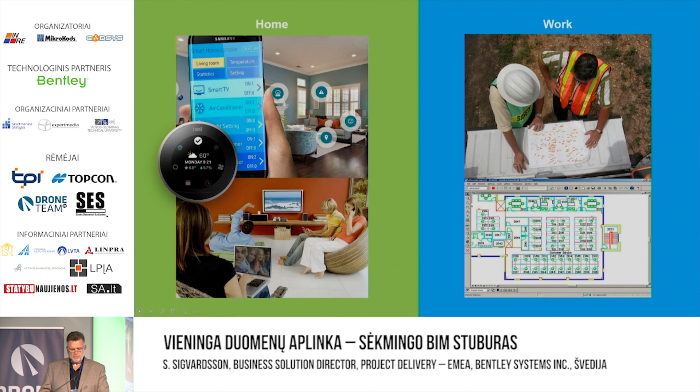Then we started to look into some more. We did see that, well, it still didn't work. We needed to include the supply chain into this as well. And that's why we started to work on cloud services for ProjectWise. But before going into that, you saw a bit of this in the previous presentation, we needed to get the technology, the processes, the people together, and also the politics, as Vladimir was saying previously.

This came pretty convenient to us, I must say, because we delivered our CONNECT Edition, our software, that was delivered in October 3 years ago. And then it went on to the summer of 2016 when McKinsey came with this survey, which wasn't that good to the construction industry.

So as you can see, we have construction down here, and below is agricultural and hunting. And I usually say that, well, if hunting was out of there, agricultural will be higher up in the hierarchy, because they're pretty good on digitalization. And we can see the IT companies and the media and so on are up there in the top. But there is still a lot to do in construction.

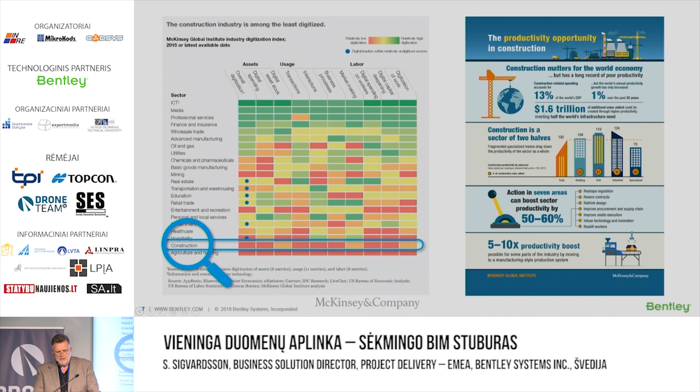And the good thing here is, or good or bad, is that there is a lot of money within the construction business. So there is a lot of money we could save by going more digital in the construction area. So they saw 5 areas, one being higher definition surveying and geolocation. I know Topcon is here. Today we have a strategic relationship with Topcon, so that goes into that area.

The next one is 5D building information modeling. This summer we acquired a company in the UK and the US called Synchro Software, where you actually can do the planning, so you can have your planning together with your 3D model, and then you will be able to also include your resources and cost of material and all of that into this software. So that is going like 5D BIM.

Digital collaboration and mobility was another area. So that is where we get in with ProjectWise and our cloud services. The fourth one is the Internet of Things. That is where sensors come in, to have sensors built into your materials that could be used during the construction, but also further on, sensors that could be used in operation of the infrastructure.

And then the last one is going into future-proof design and construction, so new materials, new methods of working, and so on. So out of this, you can also say that what we're talking about here today is all about, well, BIM. So the question is what BIM is. It could be building information modeling. It could be better information modeling. Or internally at Bentley, sometimes we call it Bentley information modeling.

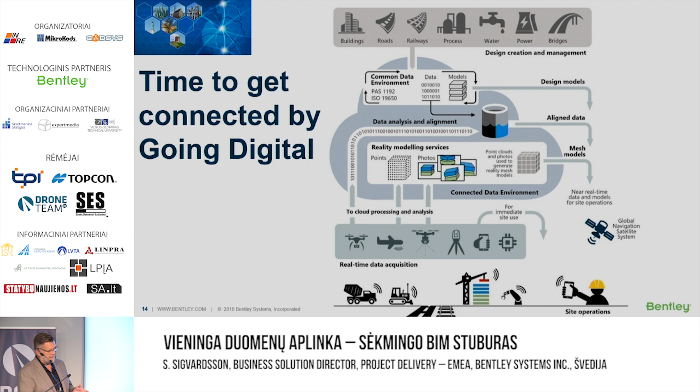Out of these, the design models, you work together with the align model and the mesh models, so you can work on the reality. The reality modeling you can do by collecting photos. We send those photos into our ContextCapture in the Azure cloud, do the computation, and you could get things like this.

So this is pure photos. Probably you know where it is, but it is a mesh model that is done out of 142,000 high-resolution photos, and it has an accuracy of 7 to 10 centimeters. If you're on a closer distance to the reality and take more pictures, then you're getting an even better accuracy in your model.

Those models could be used further on for design, but they could also be used within construction. You could actually fly a drone over the project during construction and pick up the information to get the status of the construction site. That could be done weekly or something like that.

To be able to do that, some people talk about the common data environment. We at Bentley even talk about a connected data environment. We need to have connected users, connected projects, connected assets, and connected enterprises. Within project delivery, we have the design work sharing, the BIM review, something we call BIM bid management, which we use quite a lot in the US, and construction management of, now I lost the word, but all the papers within the project, all the agreements and whatever.

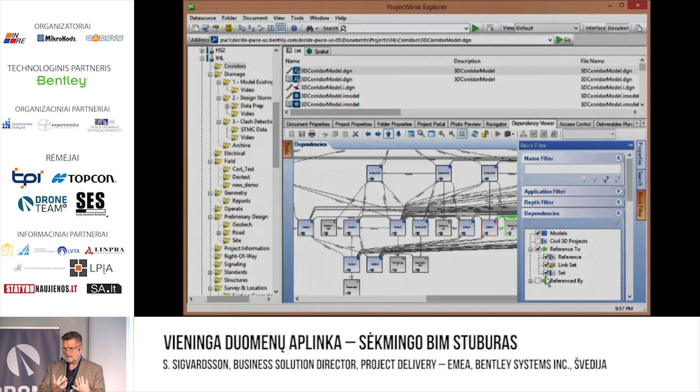And you can actually turn this one upside down, so you can look at a file you've done and then check, so how many other files are using my file in their models? And you can do a lot of analysis and things on this. And if you by chance are working with like Civil 3D or something, that is also handling or managing the shortcuts.

So how are we able to manage all of this in a folder structure like this? So I usually say that, well, this is just fake, sort of, it's just a graphical interface, because it is a database behind it. It is an index database, so we have full control of everything, and the way we're showing it is like a folder-based system, a folder structure, because that is how Microsoft taught people with folders and how files were stored and so on. So we're following that. We're not storing it in that way because we want to be able to keep track of everything.

ProjectWise Share is another one. That is our web interface into ProjectWise. So you can have a project share that is just publishing information up to a website. But you could also use the ProjectWise Share, which we're doing now with the little blue ProjectWise icon. So we manage connections down here. So we can say that, yeah, we want to make a new connection, and we do it to the project folder. So this will be sort of a project portal.

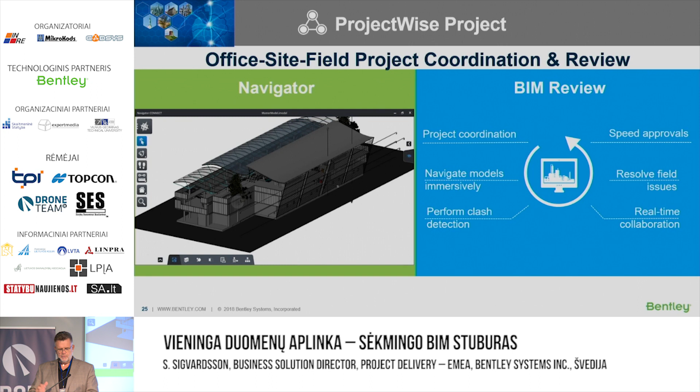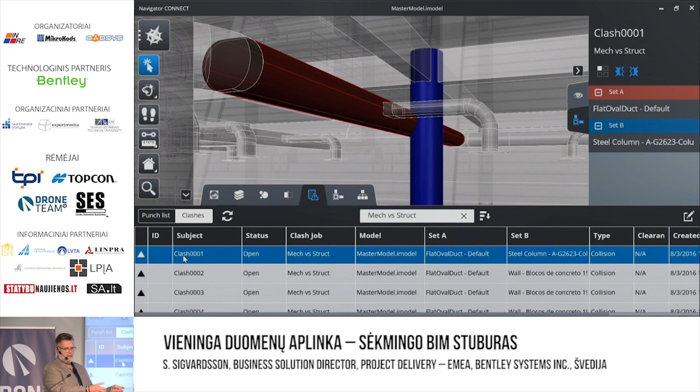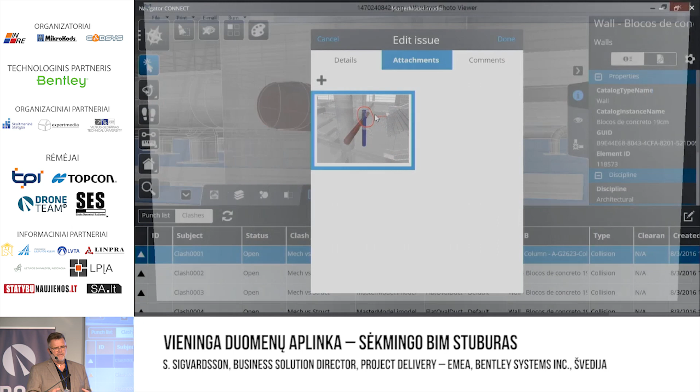So this is the view of it. This is also working on mobiles, and actually on mobiles you have steering wheels on the screen, so it's like a game - you're working in a game when you do your walkthroughs and stuff like that. You don't have clash detection and so on the mobiles because it's too heavy computer-wise to have on the mobiles.

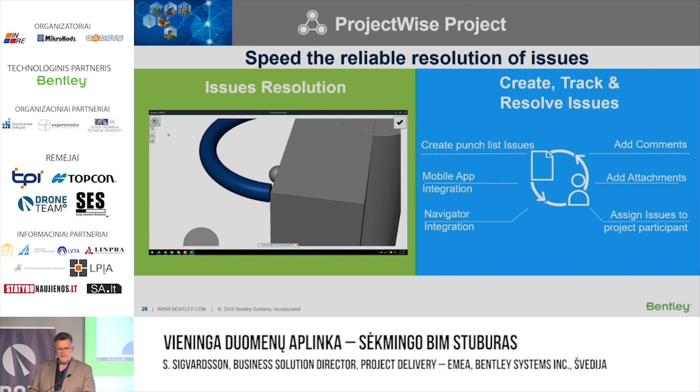So in connection with this, we have the issues resolution. Issues resolution is a center where you have a lot of issues in your models - you have your clash detections, you do markups and things like that. So you want to get them fixed, you want to have one project page. So we can see here we have the project page. We have our issue, and we're going to go further with this one.

We're going to assign it. So we see the attachment, we want to do some more comments. So this is back to this portal I was talking about, connect.bentley.com. And for this project and the issues we have in this project, we close the form, and then we pick the button again. We go for actions - all right, so we want to assign it to a special user.

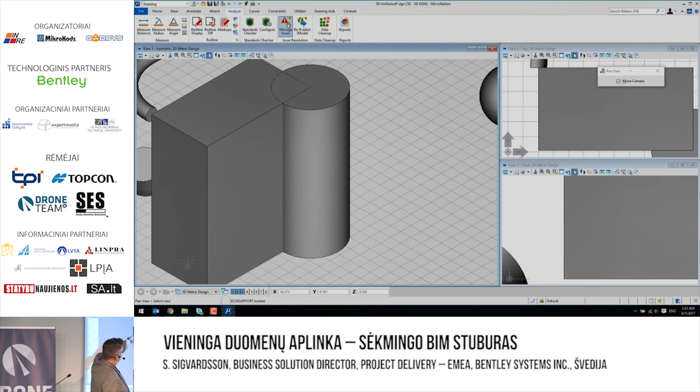So we take Bill for this one to fix it. So when Bill opened up his MicroStation, he has a new icon. And it's not only in MicroStation, it's in other ones as well - we have it in Revit and AutoCAD.

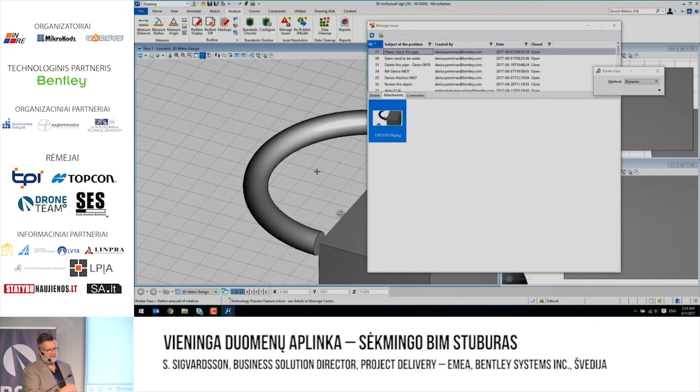So you get like manage issues, you get a closed loop here. So you have this list of issues in MicroStation as well. You can go in, pick the issue, and MicroStation goes into the model, to the place where the issue is, and then you can continue there fixing the issue and go back to the portal and say that the issue is fixed, all right?

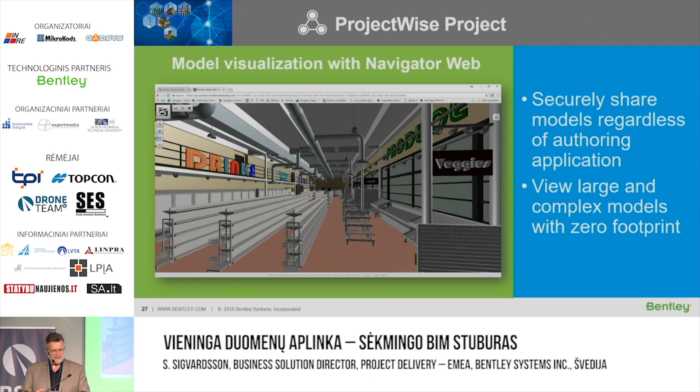A year ago, approximately, or a bit more than a year, we pushed some money into an open consortium called Cesium. At the moment, I didn't really know what it was all about. I thought, why are we putting money into something that looks like Google Earth? To me, it was another Google Earth.

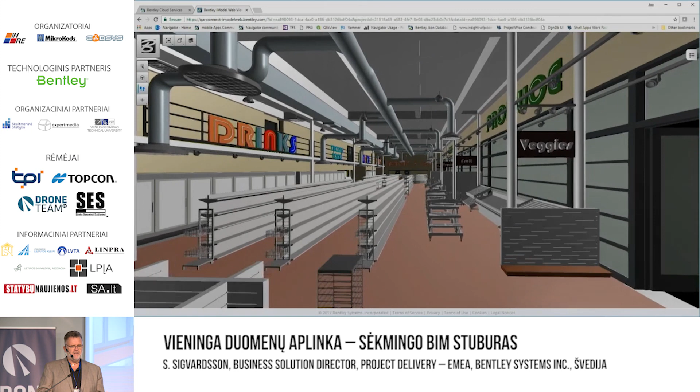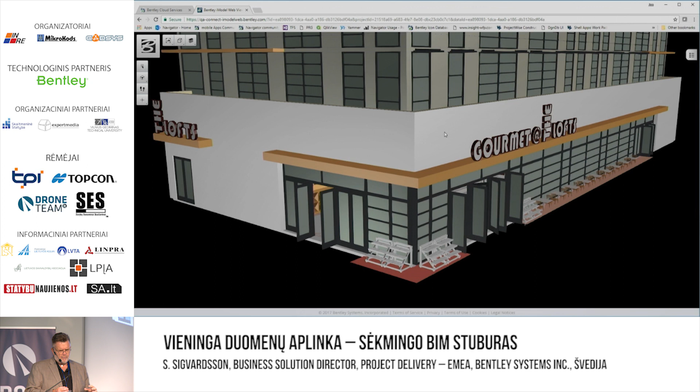But the great thing here is that we can use this technology. It's a very clever technology, about tiled 3D picture tiles within the web browser. So using a normal web browser, starting it up from within connect.bentley.com, but then it's just a regular web browser.

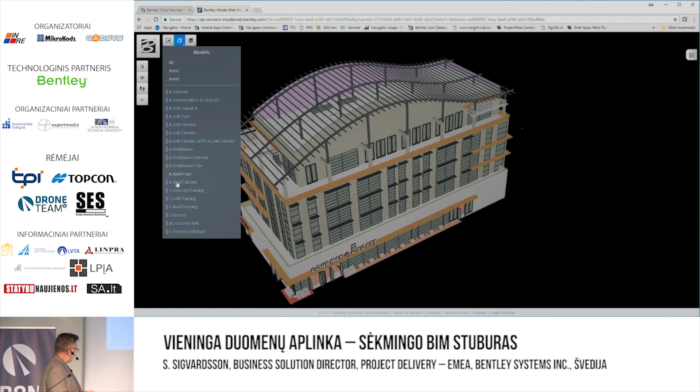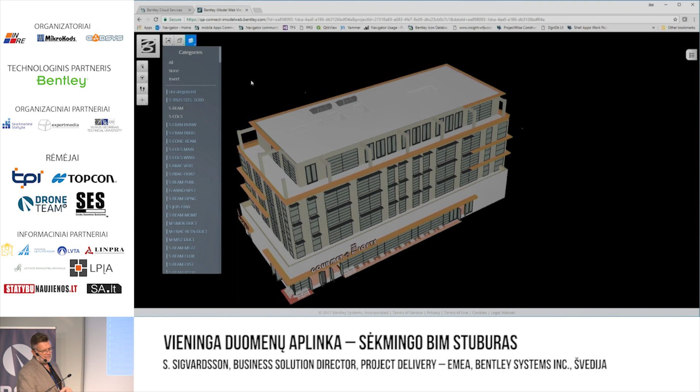We can define our own icons up there, and actually behind those icons we can have menus. As you saw, we had a menu where we went into different views. We can look at making some objects invisible and some layers invisible, so we get a clean view of the roof. So that is our navigator on the web.

Field data management is all about you creating your own forms. So you can design your own forms. It could be minutes of meetings, it could be other kinds of things, you being out doing security checking on the site, or other types of information where you want to have information going back into ProjectWise.

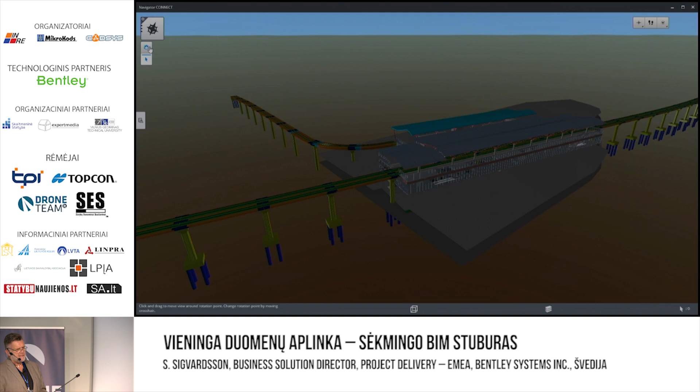So I'll probably jump this one. It's about iModels, but I want to show you this as it will probably be the end of it. This is the iModel Hub. So we can transfer information, CAD models, all different kinds of CAD software - they have their own bridges.

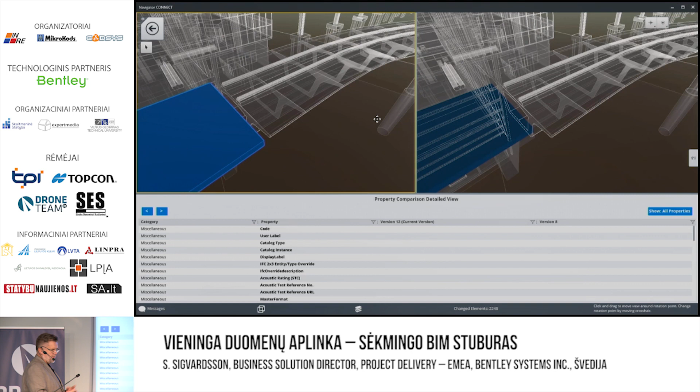Go into this model, you see different colors in here. Blue means there is something changed in the model. The red one means there is something that has been deleted between the versions. And green, all right, that is new information - green is a good color, so new information coming into the model.

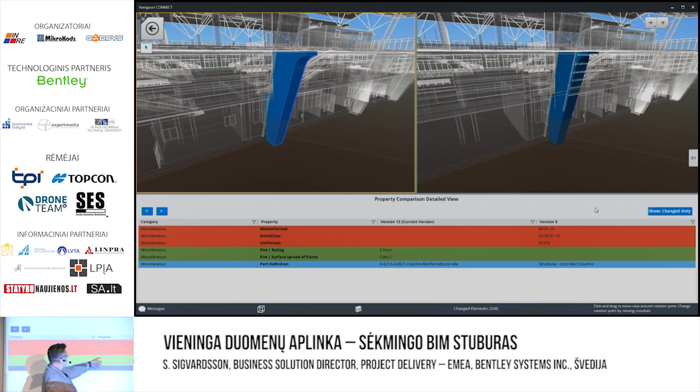So we can see - I'll probably stop here, or just make a little pause. All right, so you can see, hopefully, that the red ones are information that has gone away from the previous version. Green ones, we've done some class on the fire rating, and on the concrete one, we've changed it from concrete to reinforced concrete. All right, so that was the iModel Hub.

So as you can see, we're combining the power of ProjectWise with Microsoft 365. We're using a lot of their new technologies, and that is the way forward for being able to have a connected data environment and going into the new era of constructioneering. All right, thank you very much.